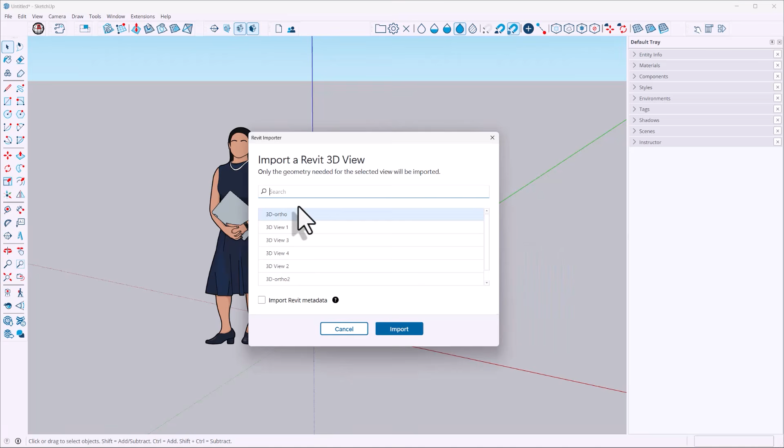Did you know you can import optimized versions of Revit models right into SketchUp? Here are 5 easy ways to maximize your existing Revit data using SketchUp.

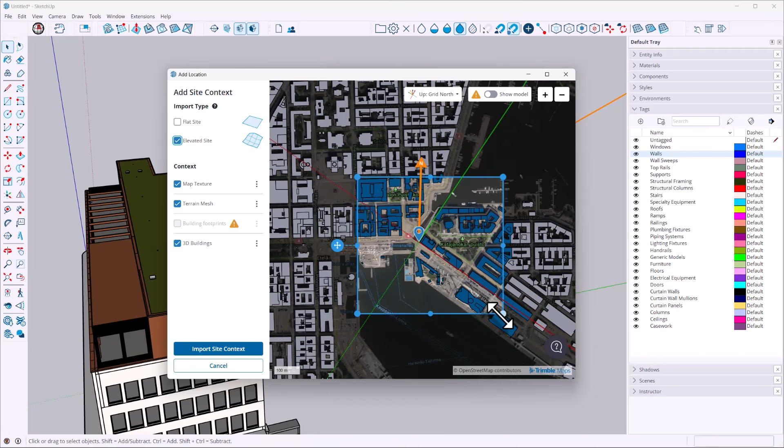The first thing on our list is creating stunning visuals. The first thing to do when creating visuals is always add context in detail. Using the Add Location feature, you can position that imported Revit model in its real-world context. We're able to import 3D buildings, terrain, aerial photographs, and immediately see our Revit model in context.

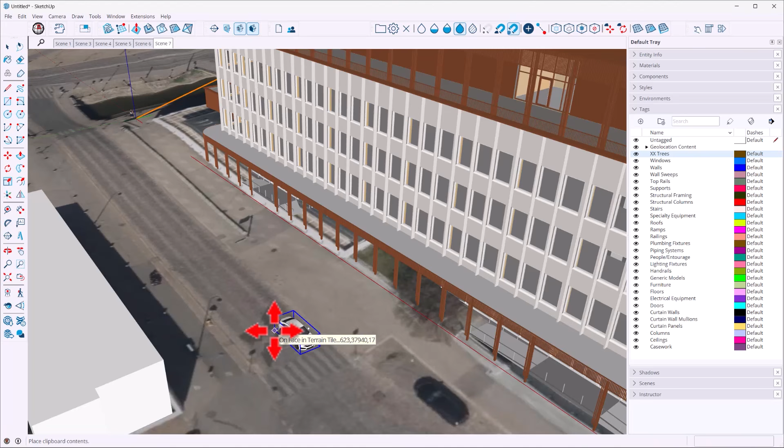The next step is adding even more detail, and to do so, we're going to utilize SketchUp's 3D Warehouse. It's the largest online library of models in the world, including everything you can imagine, from trees you can position on the hillside to people who add life and scale to our visuals, or even things like cars and streetlights. These add the required level of detail needed to create compelling visuals.

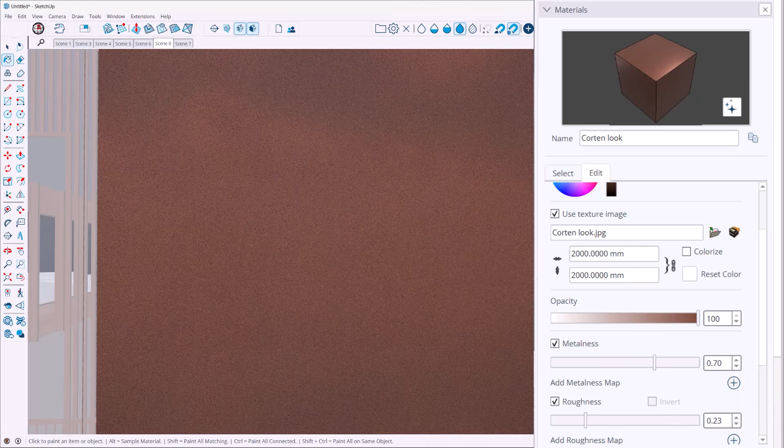The model looks okay in context, but to push it to the next level, we will start applying SketchUp's photoreal materials to this Revit model. We can control their metalness, roughness, and 3-dimensional qualities through normal maps and ambient occlusion maps. By pairing these photoreal materials with the added level of context and detail, we've quickly transformed this Revit model into a presentation-ready visual. This image can be exported and put into tender documents, pitches for public consultation, or even for your own marketing material.

As well as these PBR materials, you'll notice I've also got a sky dome here, or an environment. That is this photoreal sky that we are seeing, which of course looks great and makes our photoreal materials pop. But what it also does is allow us to create a range of images with different ambiance all within the same model. Here we have a nighttime scene of our landscaped garden.

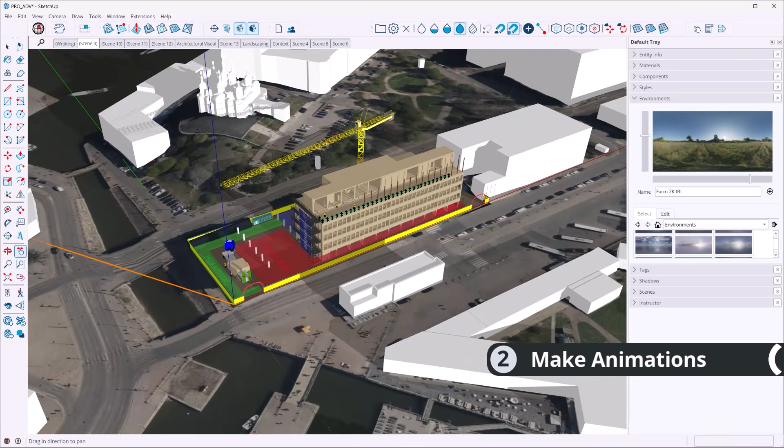The second use case is making animations. This might be animating a process, for example, animating the installation of our cross-laminated timber structural panels. These have very stringent safety zone requirements that we're able to look at in great detail from a site-wide perspective, or from the view of a construction worker on site, creating a crystal clear communication asset.

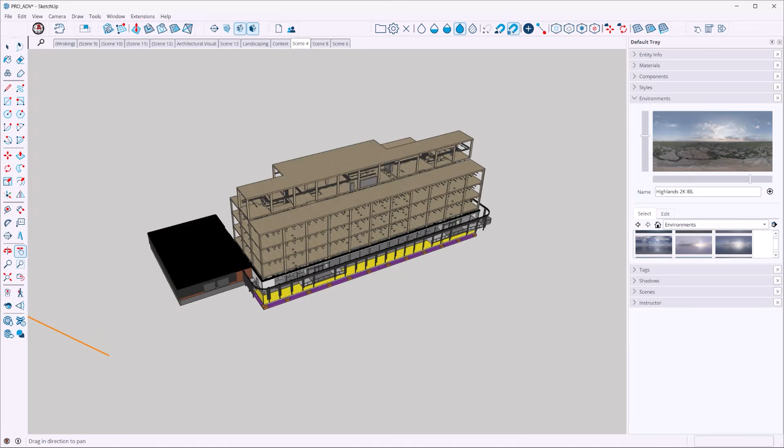It could also be a fly-through for inspecting a specific detail. In this case, we're assessing the electrical engineering strategy and its relationship to the cross-laminated timber structure, culminating in how our plant rooms are going to be arranged.

Now that we have our strategy clearly presented, it's time to share our model in order to capture feedback. In the newest version of SketchUp, we're able to share our model either via a link or directly via email with a colleague, client, subcontractor, or consultant, allowing them to leave comments in it.

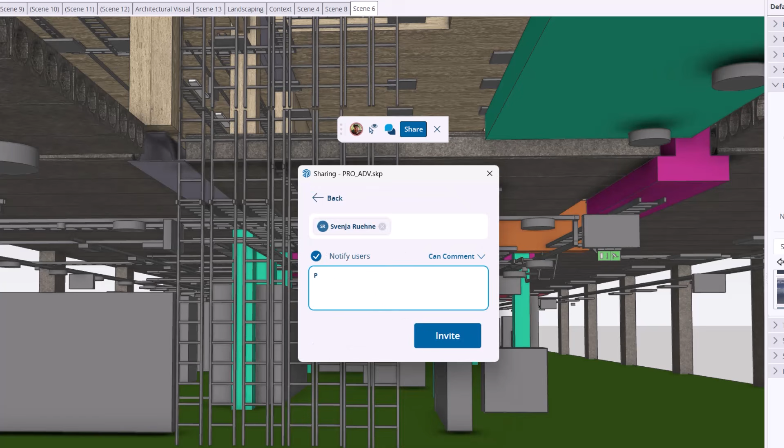In this case, you can see my colleague has joined. We can see her cursor as she navigates through the model and leaves a comment for me. That comment is associated with a piece of geometry and with a view. As such, I can see exactly what she was looking at when she left this comment.

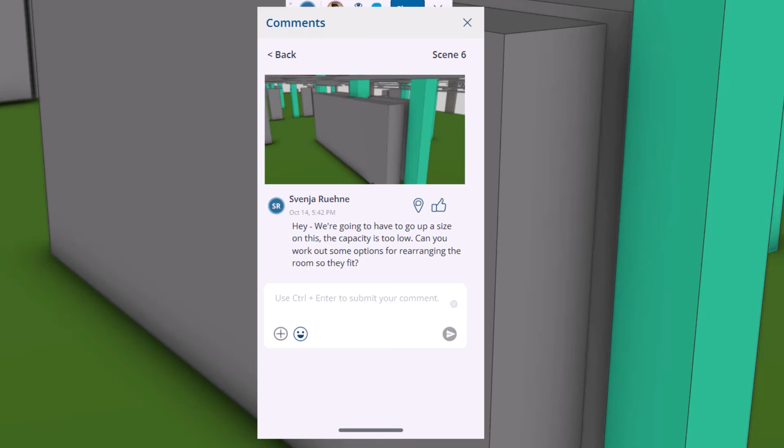She's saying that we need to go up a size on this electrical unit. The capacity is too low. Can you try rearranging the plant room and make sure that it still works with this larger unit size?

Which brings us to point 4, which is actioning that feedback and creating design options. So here, we are looking at an isometric view of the plant room in question with the machinery in there. I can also look at it in plan view.

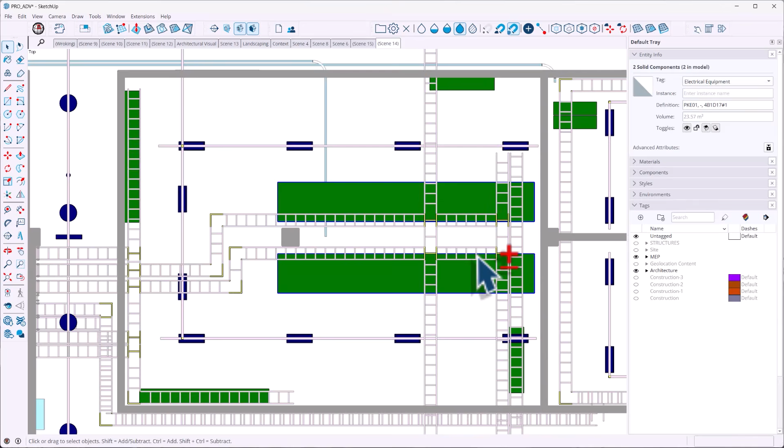When I replace those units with their larger counterparts, we can quickly see that we no longer have the correct and safe distance for fire separation between electrical units or for maintenance access. We're going to need to reorganize this plant room. By using SketchUp's intuitive modeling tools, we can very quickly create multiple design options until we land on something that we think works.

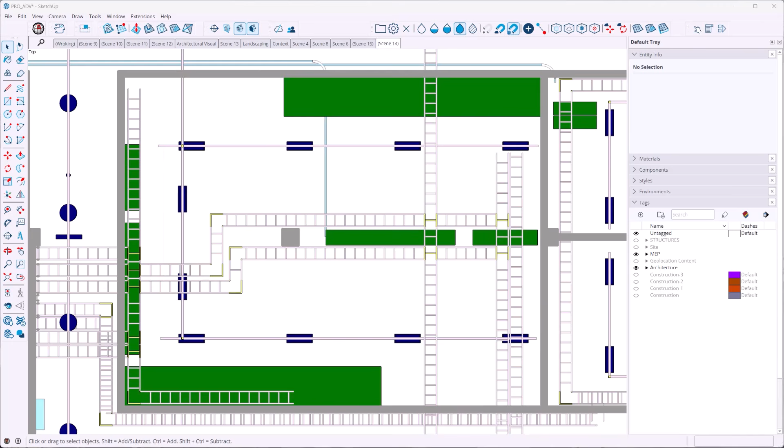We've actioned that feedback. Now we want to present it back to them. Point number 5 is documentation, or creating drawings, specifically utilizing LayOut, where we can take views from SketchUp and turn them into 2D drawings and documents.

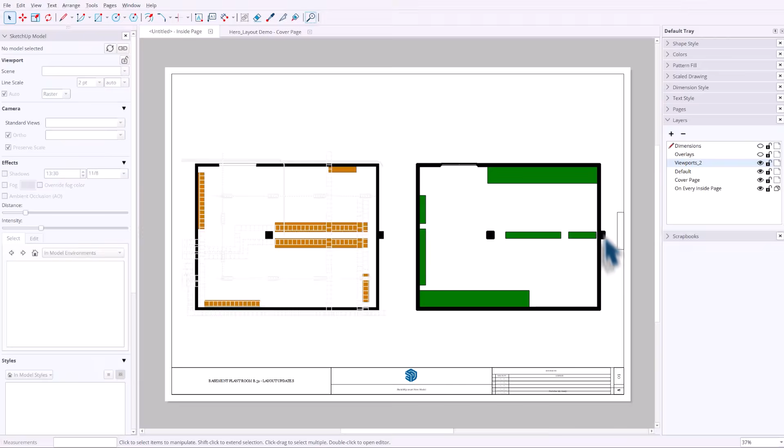In this case, we're going to take a view of that plant room and overlay all of the constraints, setting it out beside the old layout. We're able to tag components and reference their Revit metadata, and add dimensions.

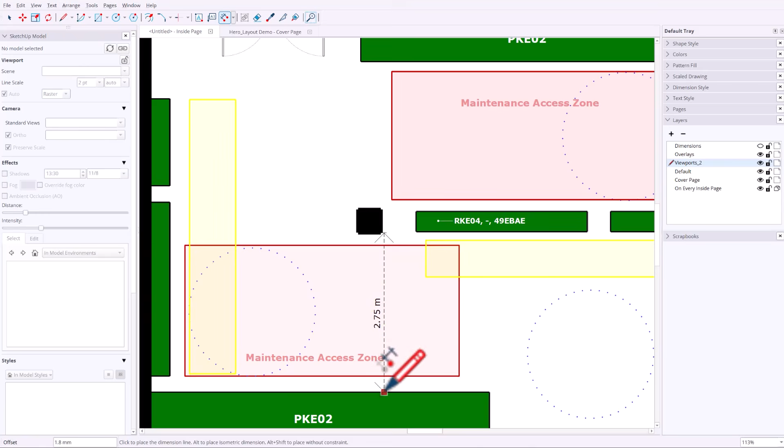We are able to quickly put together a detailed drawing that not only demonstrates our design intent, but also overlays all the constraints we're working against to demonstrate that the design actually works. So whether that's fire escape routes like I'm diagramming here, or correct maintenance zones and accessibility with turning circles, we can layer it on to produce a rich, informative drawing.

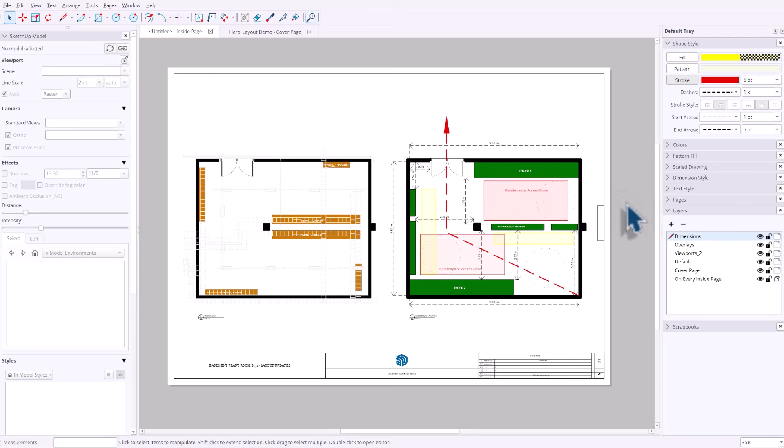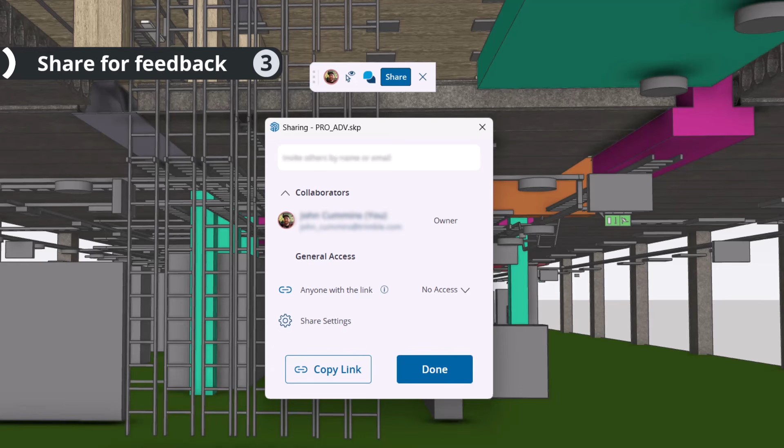In summary, 5 things you can do with a Revit model in SketchUp are: create stunning visuals, export animations, share the model to capture feedback, action feedback and quickly iterate design options, and create clear, accurate 2D documentation of your model.